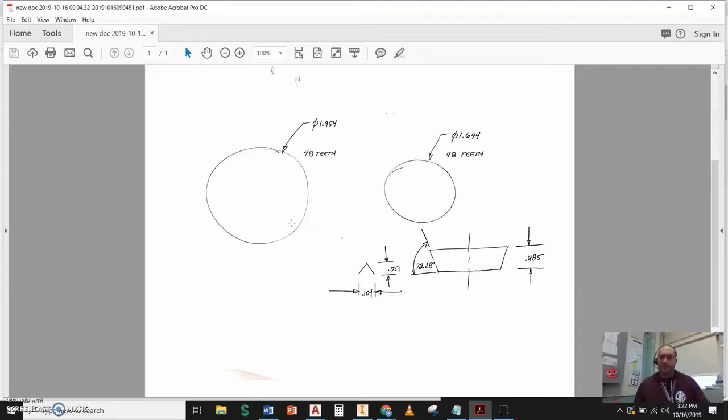So I'm going to come out here, go to New. I'm going to be coming up with this new standard inch IPT and saying Create. Starting a 2D sketch, picking on a work plane, I'm going to come out here and draw my first circle, which is going to have a diameter of 1.954. Okay, the height of the actual teeth is going to be a distance of 0.051. So I go to Offset, pull this in, 0.051.

I'm now going to draw a line from the top of the circle, take that down here to the center point. I'm going to go ahead and just offset this now. So I found the width of the actual teeth is a distance of 0.104. So I'm going to go 0.104 divided by 2. Okay, I'm going to go ahead and split the difference on that side. I'm going to do the same thing here. So 0.104 divided by 2.

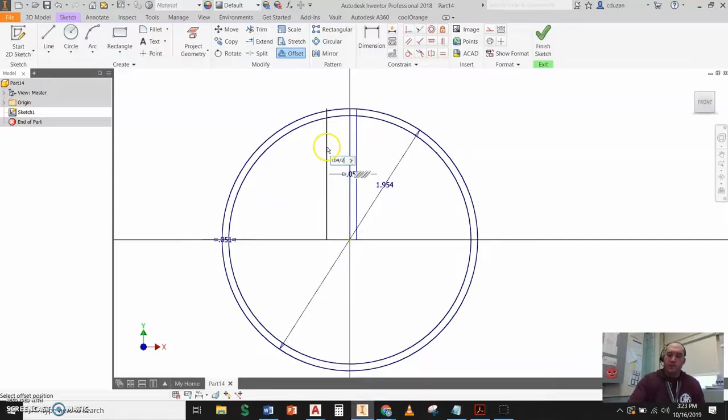Okay, and then what I'm going to do is just zoom in here. Go ahead and draw a line starting from this intersection, taking this up to the top of that line, and then from the top of the line, taking it back over here to this intersection right here. And now all I have to do is come in here and delete those 3 lines and go ahead and delete the outside circle, which I don't need anymore. Okay, so now we have that done.

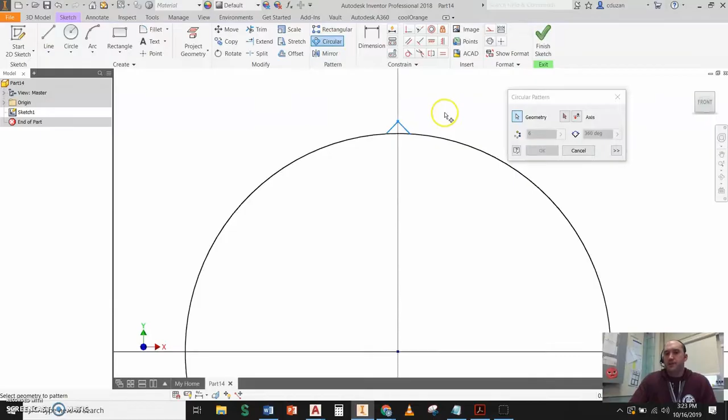We can go to circular pattern. I can go ahead and grab those 2 lines and make up that geometry. Go to the red arrow, come in here and find my axis, which would be this point, and say that we need 48 of those teeth. And I'm going to go ahead and hit the double chevrons and go ahead and uncheck this associative and say OK.

Okay. So I've tried doing this a couple times with circular pattern. It was failing the way I want to do it just because it wasn't closing the loop. So we're going to have to kind of go old school on this one. We're going to come out here and just start trimming below each one of these little triangles.

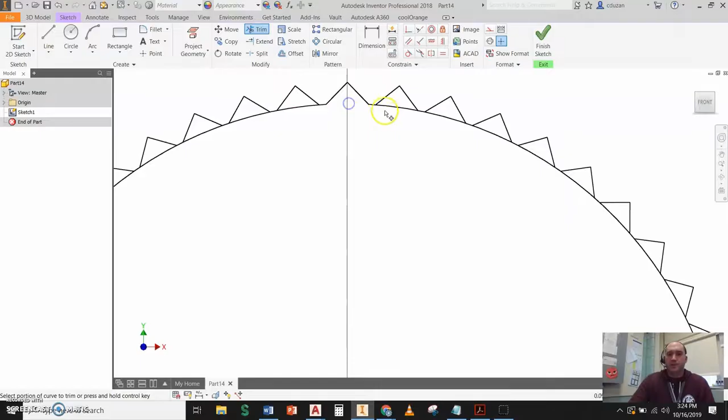So that's what you're going to have to do just for a second. I'm going to do a quick pause. As you can see, I've gone out there and trimmed all that. I'm going to go ahead and say OK on that.

Before I get out of this sketch, I'm going to grab all that, right click, and do a copy. Now I can go ahead and finish the sketch.

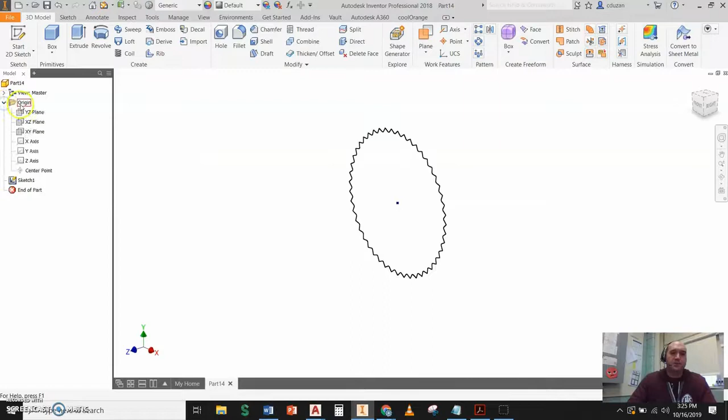Once I finish the sketch, I'm going to come over to my origin folder and turn the plane on in which that sketch is on. I'll right click, go to visibility, and turn that on. Start a 2D sketch, come up here to the border of that plane, pick, hold, and drag. I'm going to pull this out the distance, the thickness of our Reese's Peanut Butter Cup, which is 0.485.

Now all I have to do at this point is right click and do a paste. That has pasted that sketch in. We can't tell because it's stacked right on top of it, but trust me, it's there. Now what I'm going to do is come in here and grab all that.

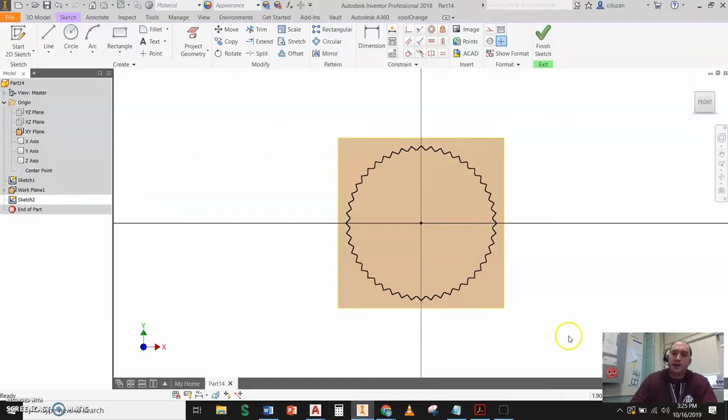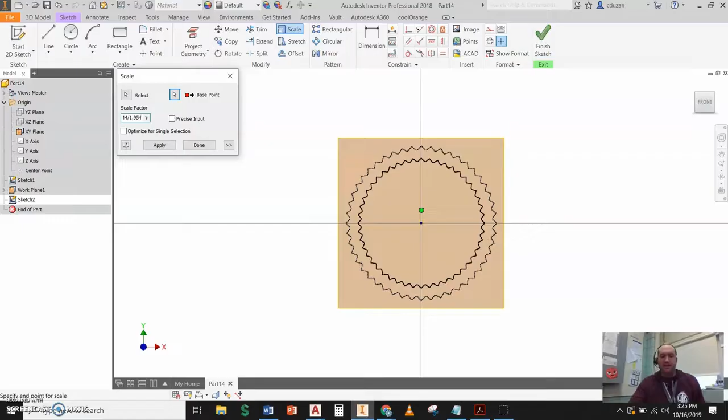I'm now going to come out here and go to scale. My red arrow, I'm going to point to this point right here. For my scale factor, I'm going to start with what I want this to be, which is 1.644, and divide that by what it currently is, which is 1.954, to come up with that scale factor. Once I'm done with that, I'm going to hit apply and done.

Now what I'm going to do is finish the sketch. So we can see we have 2 sketches on top of each other, which means we have a prime candidate here to go out there and do some loft. So let's go ahead and do the loft.

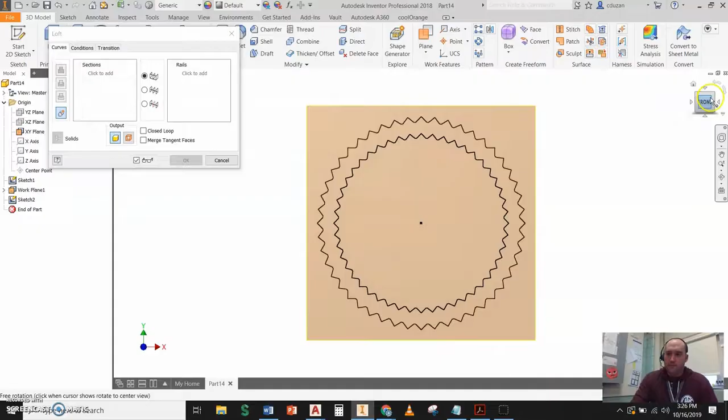Let's pick on loft. Now when you're going to loft, what I recommend you do is make sure you get to a view cube plane, where you can see these right on top of each other. I'm going to zoom right in here. I'm going to come in here and pick the top of this triangle for that profile, and then pick the top of this triangle for that profile, and go ahead and do an OK.

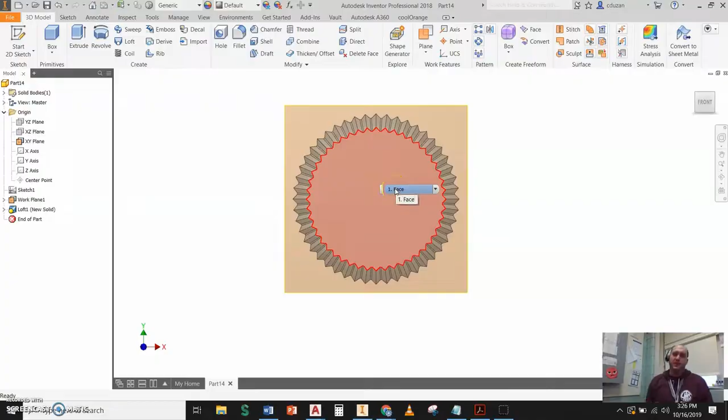I'm telling you to do that because sometimes if you're not picking those right in line with each other, it's going to give it a twist or torque. But we can see that the peanut butter cup came out absolutely perfect in this case, using loft. Kind of cool, right?

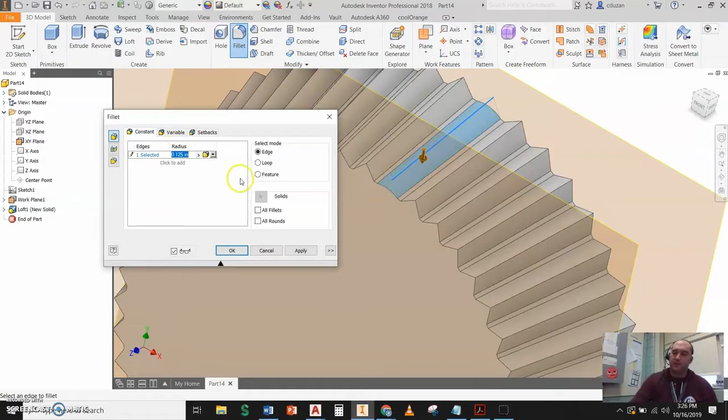So what I'm going to do is, if you kind of look at the Reese's Peanut Butter Cups, these edges on these points are not exactly that sharp. So what I'm going to come out here and do is go to fillet. I'm going to pick the top of one of these, put in my fillet radius, which is 0.02, and say OK, so it's going to round that over.

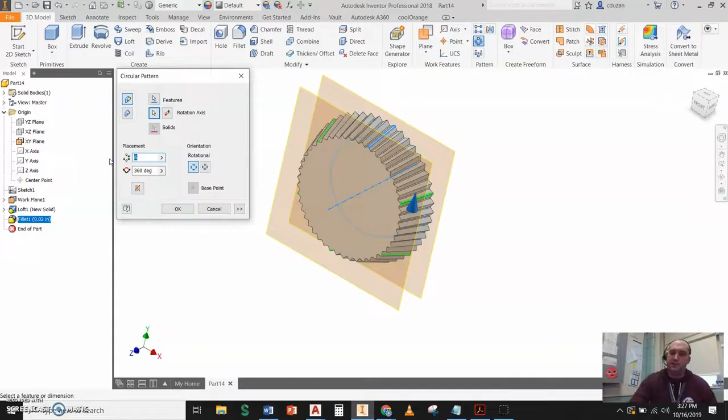Obviously we have more than just one of those, so I'm going to come out to circular pattern. I'm going to pick on the top of that fillet, go to my red arrow for my rotation axis. I see we have nothing out here, but I know that that is my Z-axis, so I'll pick on that. We can see it's placed 6 of them. Obviously, we need more than 6 — we need 48. We're going to go ahead and do an OK.

And now each one of those points has been rounded over. So this is really starting to look like that peanut butter cup. So I'm going to come out here and just turn off some planes, just turn the visibility off on some of those just to clean this up.

Now I'm going to come out here and find a plane that's going to go right through the center of that. I'm going to turn the visibility on and start a 2D sketch.

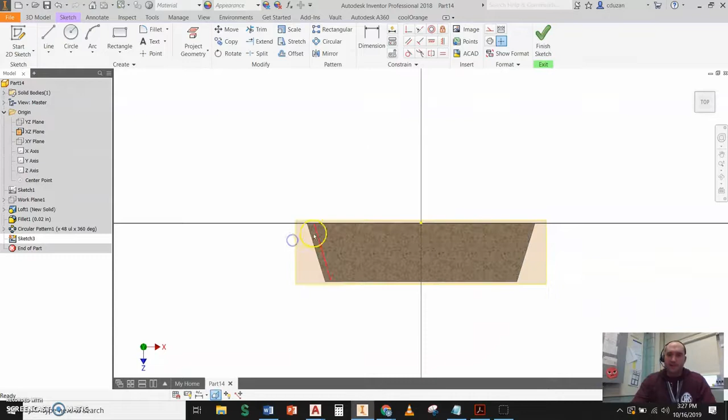On that plane, I'm going to right click and go to Slice Graphics. I'm going to draw a line right down the center of this, place it, and then dimension the top of that line to the top surface here.

I'm going to make that a distance of 0.03. Same thing with the bottom, from the edge of this line to this surface, also 0.03. Just keep in mind the pocket, the cavity that we are creating, is 0.03 up off the bottom. We're going to need to know that later.

I'm going to go to Project Geometry, pick the end of this, and project that through. Then I'm going to go to Offset, pick this, and pull it out a distance of 0.06 for the offset.

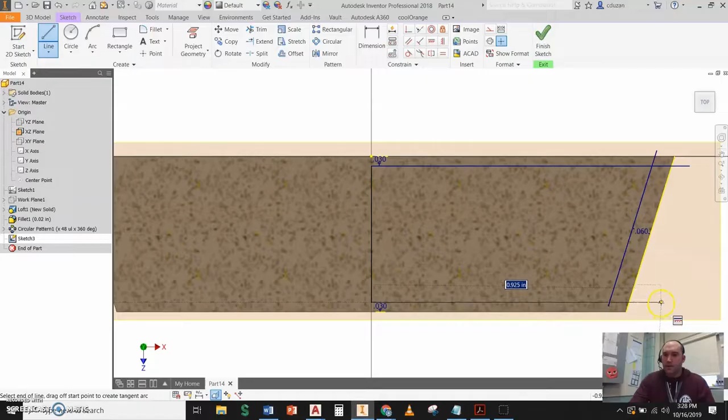Now I'm going to draw a line starting from the top of the line I just drew, keeping this 100% horizontal. I'm going to do the same thing down here at the bottom, going to the bottom of this edge, or this line, and pulling it all the way across, keeping that horizontal.

Now I'm going to trim this out, this one and this one. I now have the profile I'm looking for, so I'll finish the sketch and come out here to Revolve. That's the profile I'm looking for.

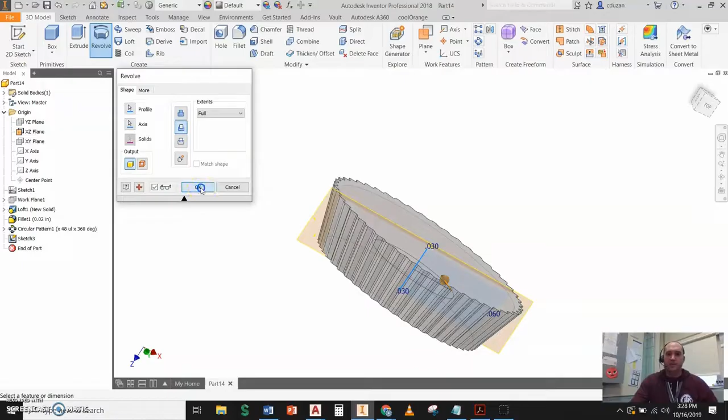Red arrow for the axis, right here to this line, and this needs to be a cut revolve. I'll go ahead and say OK. Now I'm going to start a 2D sketch.

I'm going to come right here to this work plane, right click, go to Slice Graphics, and project some geometry, pulling that through. I'm liking that, so I'm going to create a new standard inch IPT at this point and start a 2D sketch.

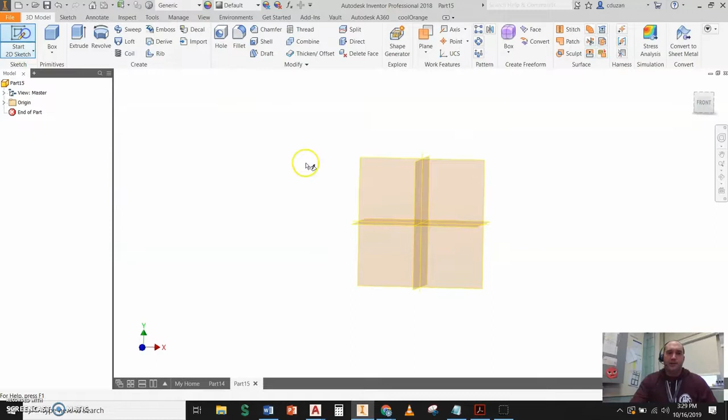I'm going to jump back over to that Reese's Peanut Butter Cup because I want to take this geometry and do a copy. Then jump back over to the part I just created, right click and do a paste.

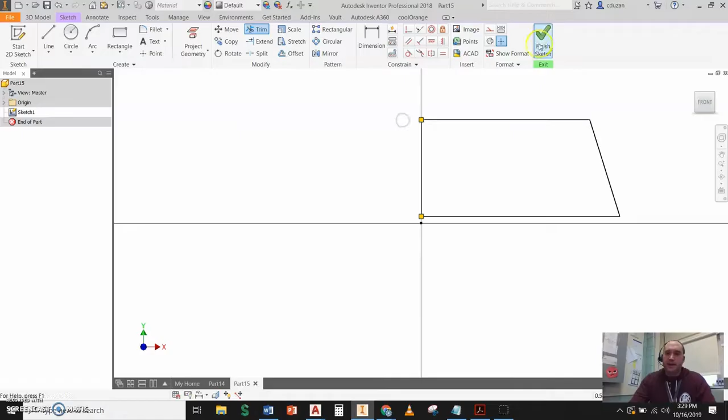Now all I have to do is draw a line from here to here, then draw a line from here to here. I can trim out the rest of this and finish that sketch. Then I'll do my revolve along this axis and say OK.

At this point in time, obviously your kids can go out there and start applying materials and colors and all that good stuff. I'm going to skip that just to save ourselves a little bit of time.

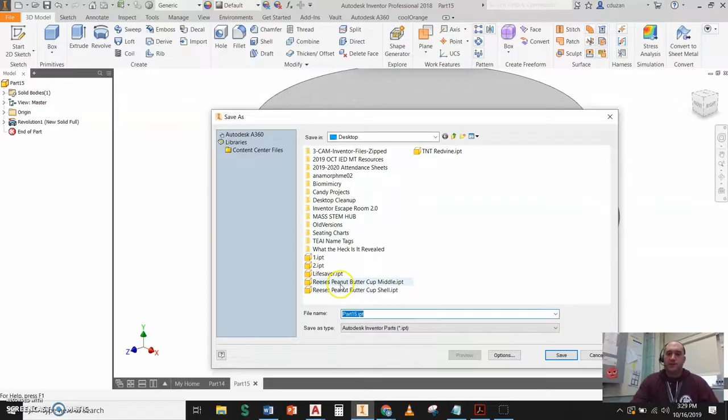I'm going to save this one that we just created, that revolve, as Reese's Peanut Butter Cup Middle. I'm going to go ahead and do a save.

I'm going to jump back to the old part. This was the actual shell. I'm going to save that as Reese's Peanut Butter Cup Shell. So I've got that part.

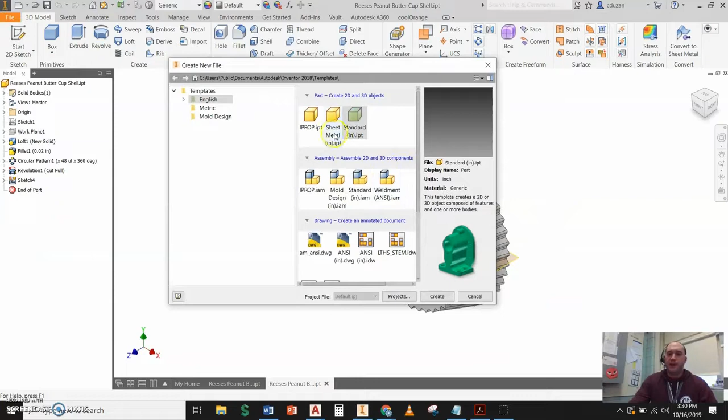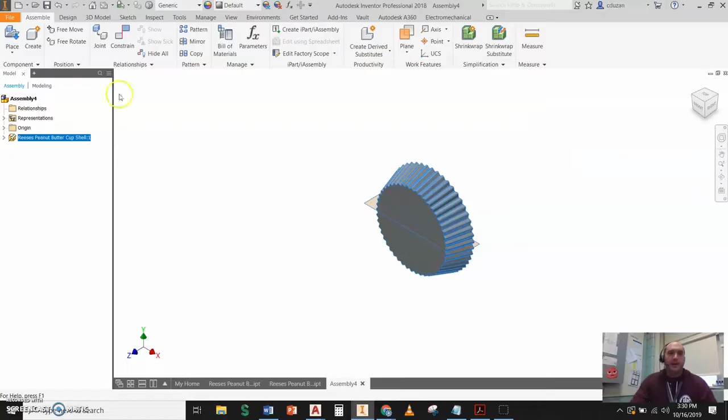Now what I'm going to do is come out here, go into the IAM environment, and place my Reese's Peanut Butter Cup Shell. If I can find it in this complete and total disaster, there it is. I'm going to drop that in, right click on this and ground it, and now place in my Reese's Peanut Butter Cup Middle.

Okay, so I'm going to go ahead and drop that in. So what we're going to need for the assembly on this one is we're going to need those axes that are going to be showing for both of these. So if you just double click on one of these, okay, I currently have that open, so all I have to do is come up here to Origin.

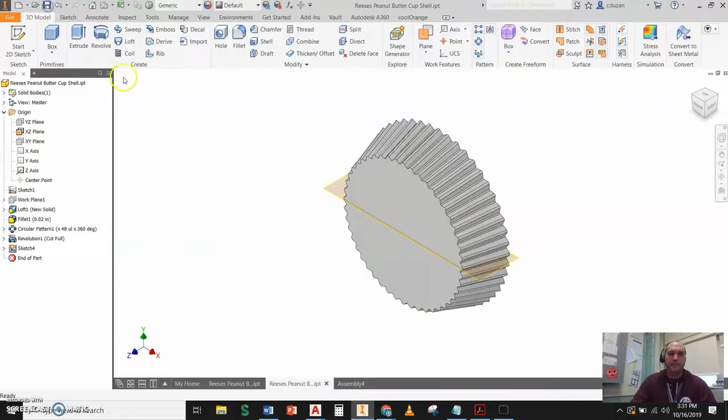I can come out here and go ahead and turn on that axis and go ahead and do a save. Same thing, I jump back into assembly. If I were to double click on the middle part of this, it's going to open that up because it's currently open. Go out here to Origin, find the axis that goes right down through the center of that, right click, turn the visibility on, jump back over to the assembly.

Okay, so now we're basically sort of set up with things that we need. So we're going to come out here and go to Constrain. I'm going to pick on this axis, and pick on this axis because we're going to go ahead and do a mate. We're going to go ahead and do an apply.

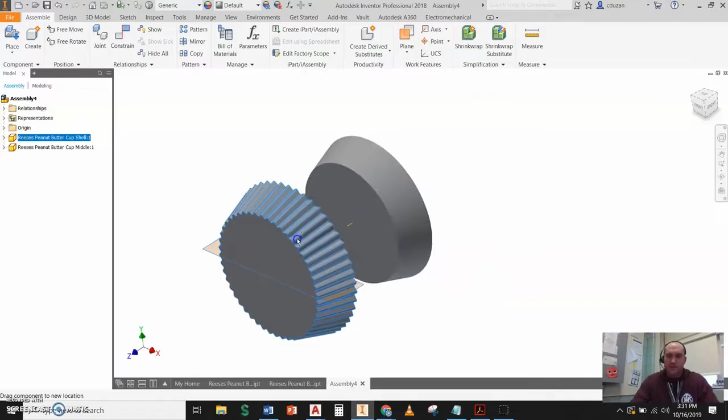Okay, so it's going to be kind of hard to see that middle. It's actually kind of throwing it in there. So what we might have to do is just come out here and turn off the grounded option just a little bit. Pull this out just a little bit. And I'm going to go ahead and reground that.

And then all we're going to have to do now is go out here and, well, if we want to kind of lock that down, I guess what we're going to have to do is turn on this work plane. So I'm going to go ahead and just turn the visibility on, jump back into the assembly, and I'm just going to come out here and do a flush between this work plane and this work plane.

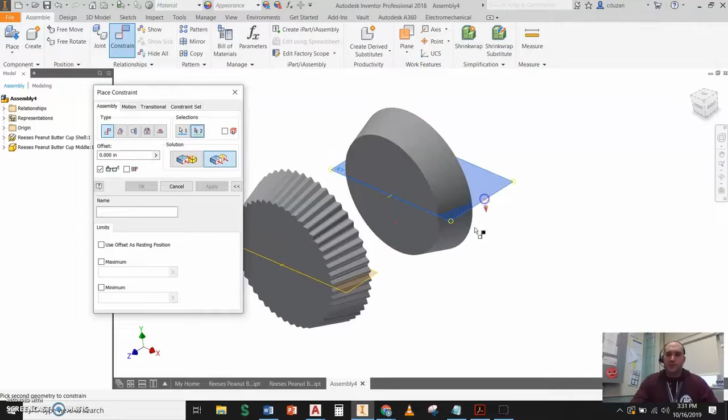All right, actually we can make it a mate. Let's go ahead with apply on that. Okay, and then now we can do our flush. So we're going to say this face and this face here. And then our offset needs to be 0.03. Okay, and we're going to go ahead and say okay on that.

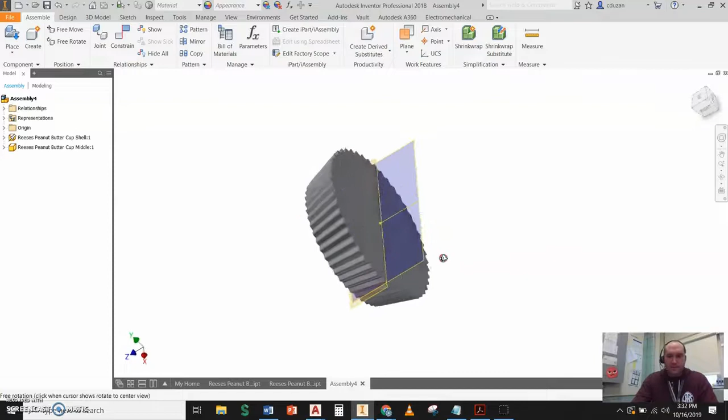And we'll see that the middle is right there, smack dab in the middle of the cup. So we're going to go ahead and do a save as real quick. Give it a special name like so. And then here's what's really cool is we can jump over here into our IDW environment.

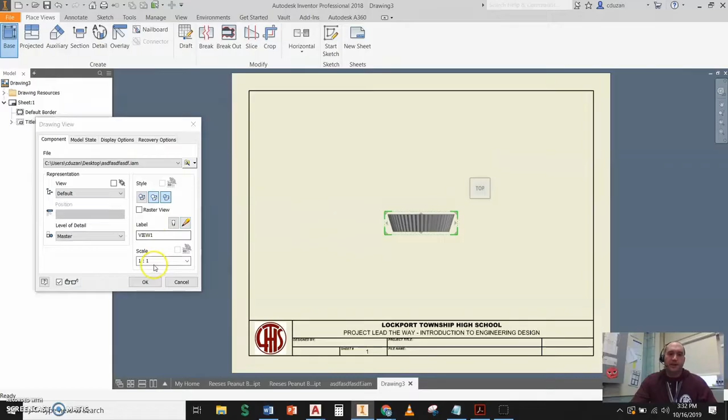Okay, we can go into our base view. We can go ahead to our view cube, change that up. We can go ahead and bump this scale up. I'm just going to make this 2 to 1. I'm going to go ahead and say okay. All right, so there's our Reese's Peanut Butter Cup.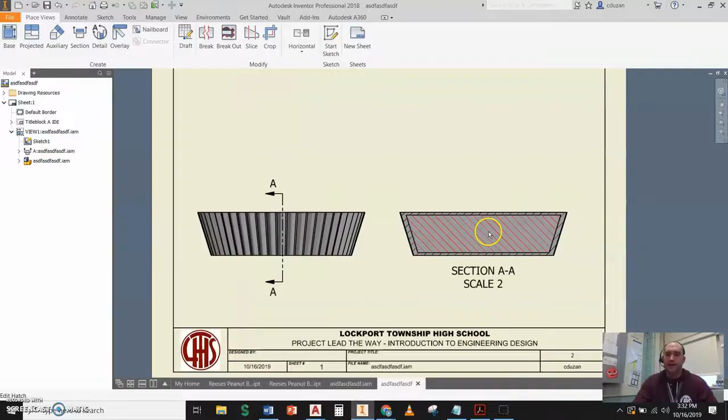And what we're going to do is come out here and do a section view. So I come right here, right here to the center. I'll go ahead and pull this up, pull this straight down, go right through the cup, right click and say continue, pull this over. And now we are looking at the inside of our Reese's Peanut Butter Cup. A really cool way to show section views. It's the same exact thing we were doing with Kit Kats last week.

So some great stuff you can do there with Reese's Peanut Butter Cups, section views. A lot of great features to go out there and mess around with, like loft, and there's a little bit of assembly with that one. So there you go. That's America's #1 Halloween candy, the Reese's Peanut Butter Cup. Challenging, a lot of great features with it, but a lot of fun.